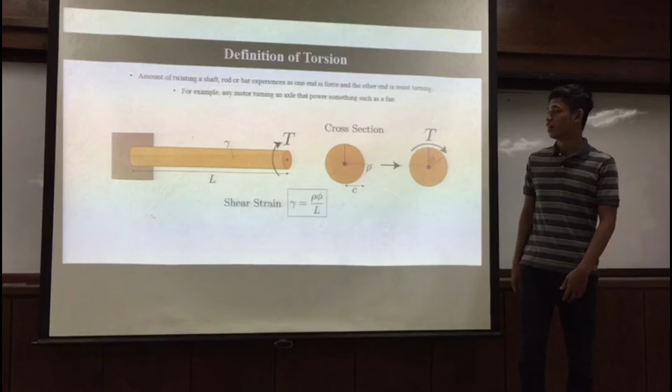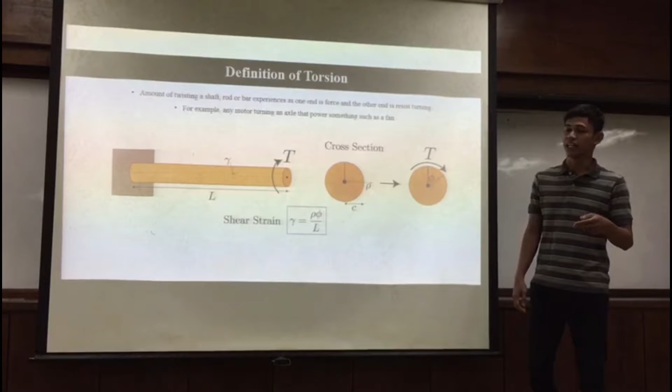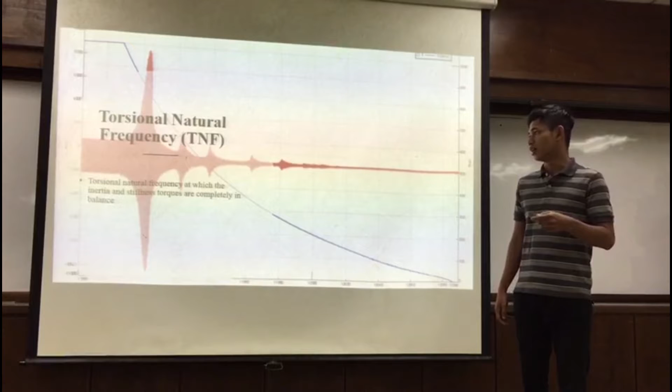I'm going to explain to you about the definition of torsion. Torsion is the amount of twisting a shaft, rod, or bar experiences as one end is forced and the other end is resisting. For example, any motor turning a shaft that produces power, such as a fan. Torsional natural frequency is the frequency at which inertia and stiffness torque are completely in balance.

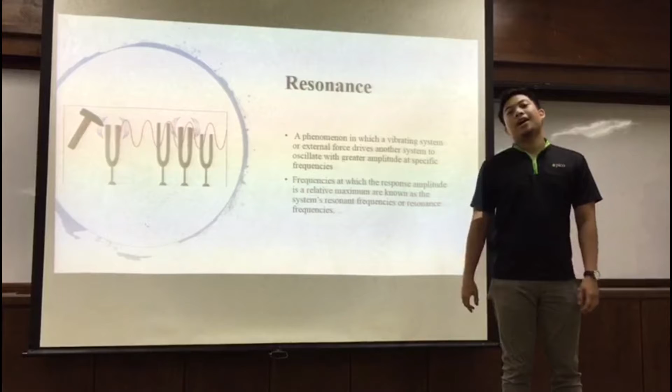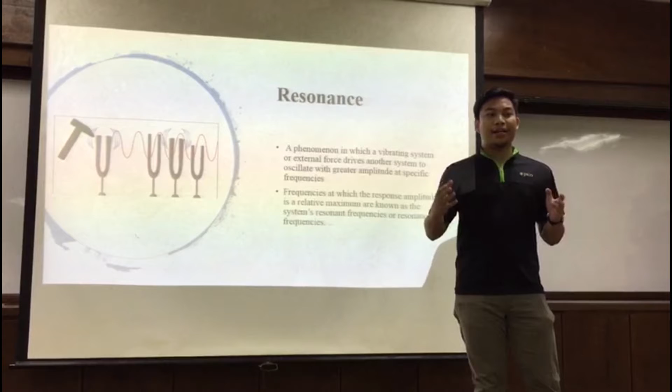Hi, I'm Afnan Rozani. I'm going to explain to you about the definition of resonance. Resonance is a phenomenon in which a vibrating system or external force drives another system to oscillate with greater amplitude at specific frequencies.

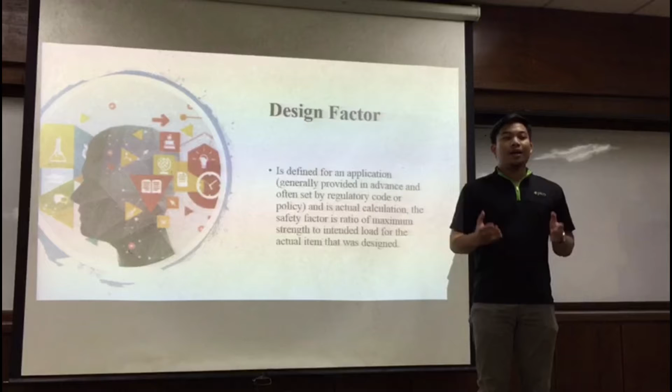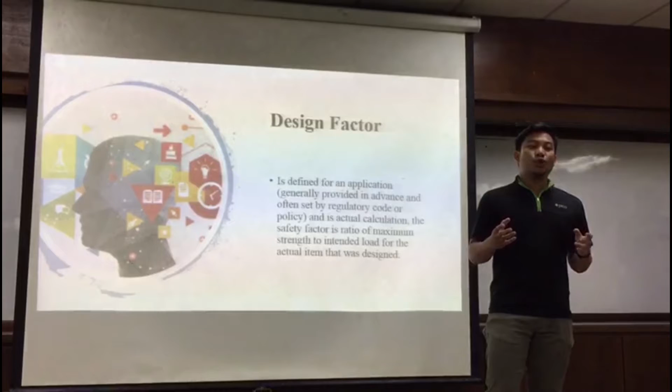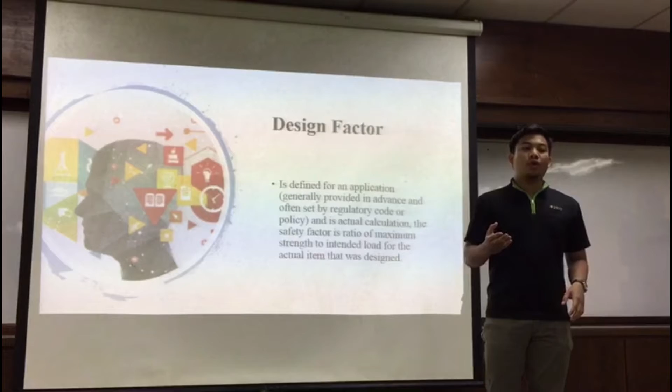Definition of design factor: the design factor is defined for an application, generally provided in advance and often set by regulatory code or policy, and its actual calculation. The safety factor is the ratio of maximum strength to intended load for one item that was designed.

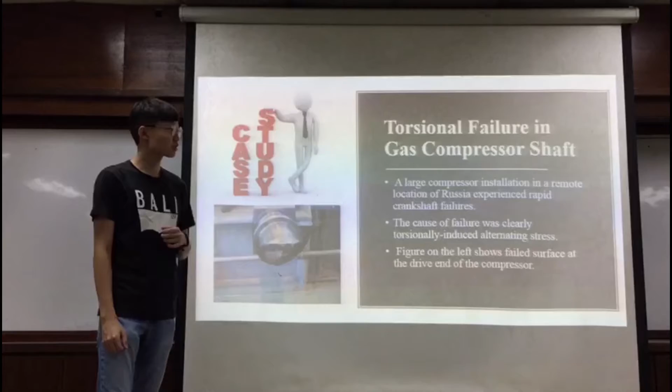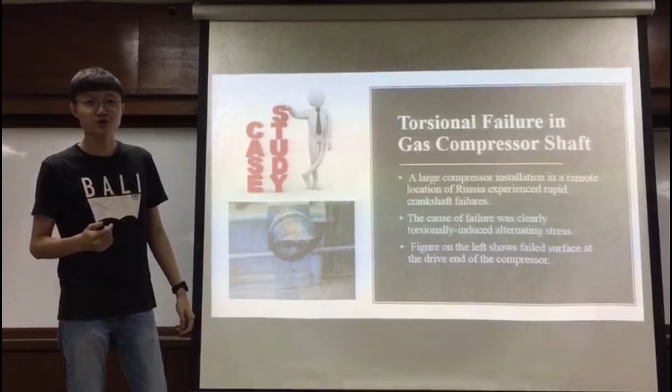The case study for our project is about torsional failure in a gas compressor shaft, which occurred at the outskirts of Russia, where the compressor experienced rapid crankshaft failures. The cause of the failure is mainly torsionally induced alternating stress. As you can see in the picture here, the end of the compressor experienced a failed surface.

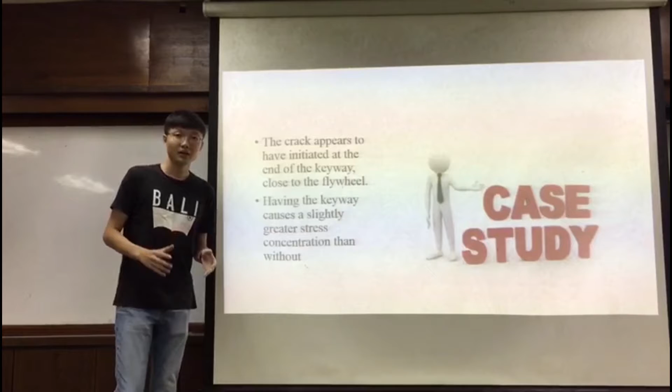Before the failure, cracks appeared to be initiated at the end of the keyway close to the flywheel. Having the keyway causes greater stress concentration at that point, which causes the failure to occur.

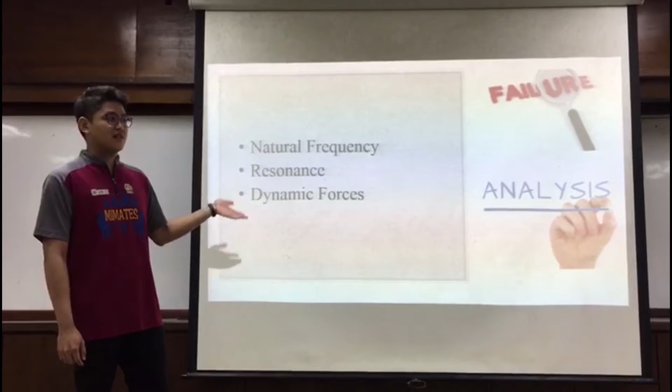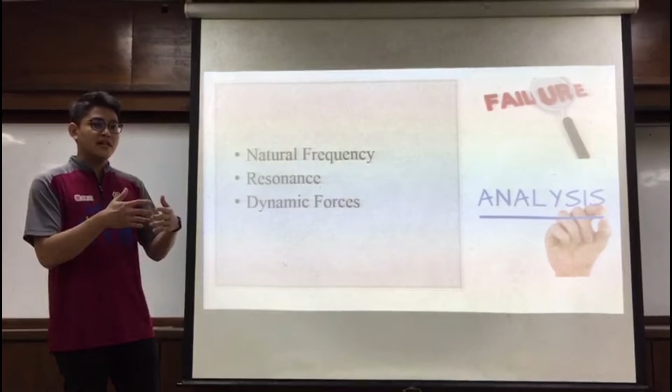Today I will talk about, as Chen says, our failure of the compressor gas shaft. Why does the failure occur? First, the natural frequency. The natural frequency occurs when the shaft is moving; the shaft will experience a frequency. When the frequency reaches the natural frequency, the shaft will experience breakage or destruction.

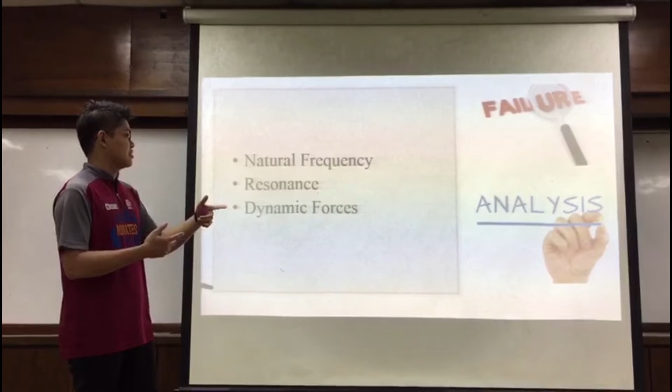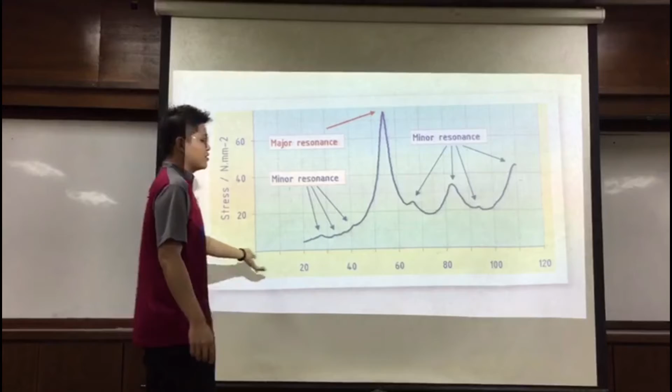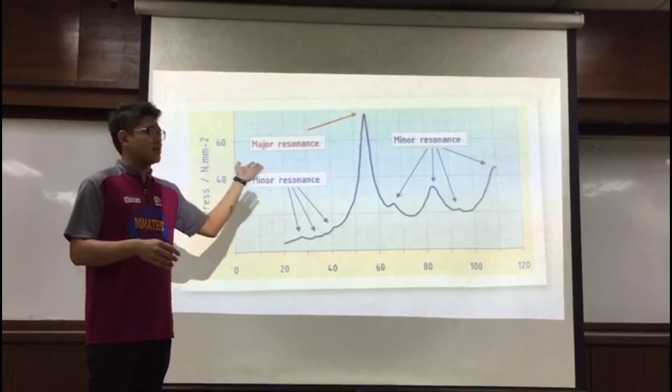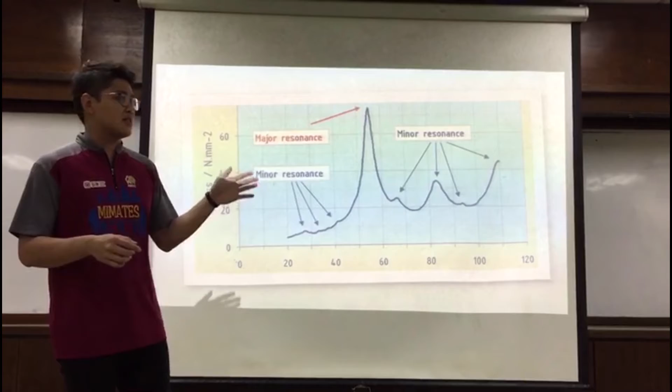The major resonance is where the failures start to occur. Before 55 RPM and above 55 RPM, the crankshaft will experience a frequency which is within an acceptable range.

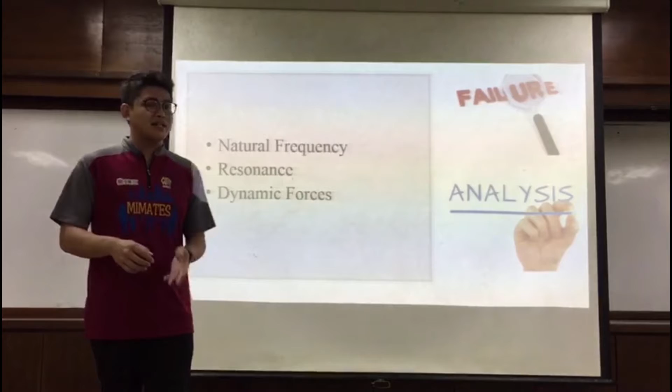Next, dynamic force. What is dynamic force? Dynamic force is the force experienced by the crankshaft, resulting in extra thrust on the shaft, which causes the crankshaft to fail.

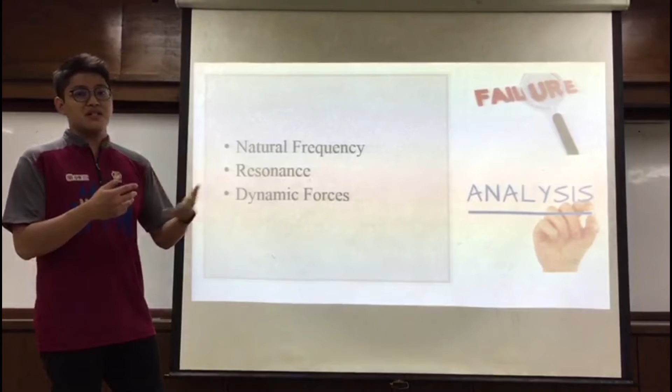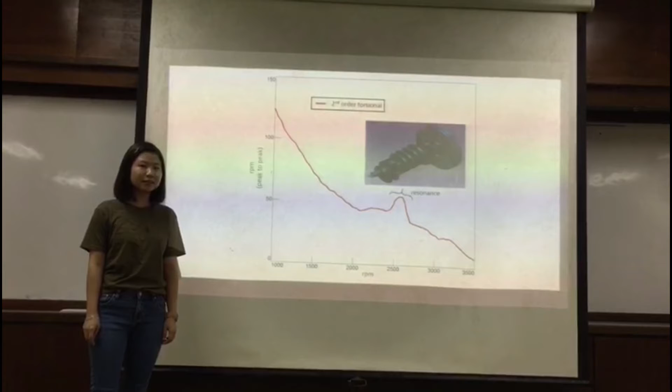So how does torsional vibration come from? Torsional vibration comes from two loads. First is the gas load, which acts on the pistons and is transmitted to the crankshaft in the compressor. The next is the inertial load due to the weight of the piston. By adding these two loads, we can find the combined torsional vibrational load in the system.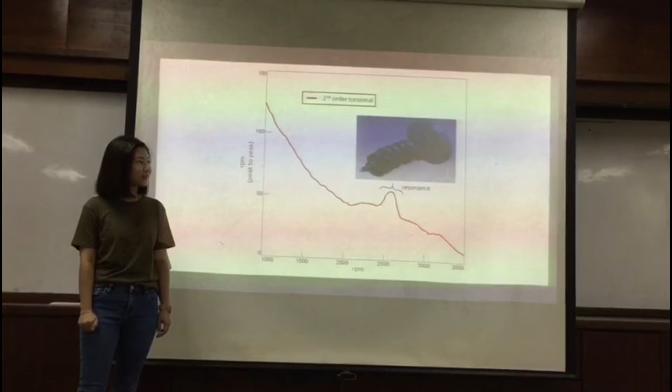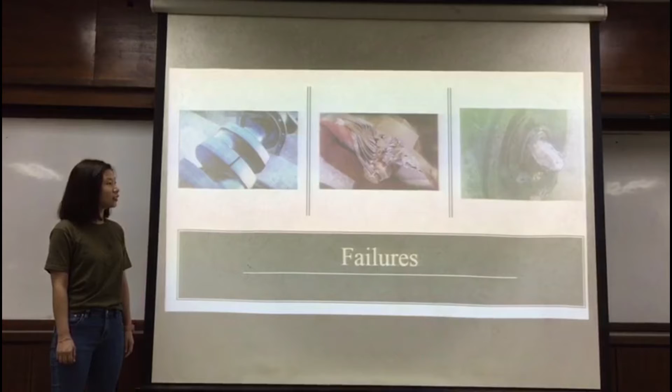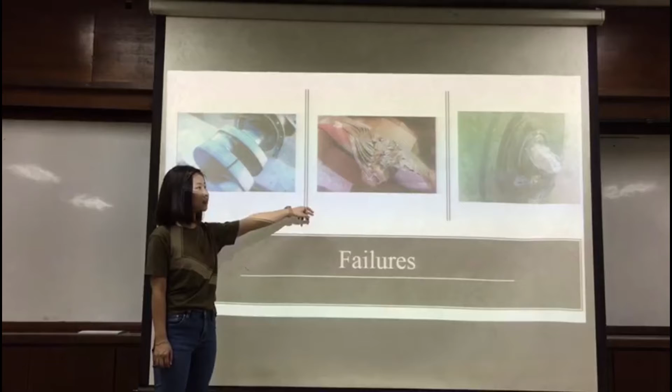Therefore, torsional analysis is very important in predicting resonance conditions and vibration conditions. These are the following consequences if the system fails: first, the broken crankshaft; second, destroyed couplings; and third, broken engines.

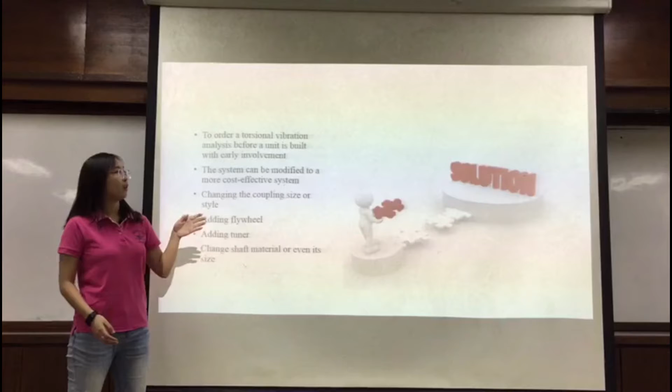Next I will be explaining the solution, which can be set as some suggestions to improve the system. First is to order a torsional vibrations analysis before the system is built.

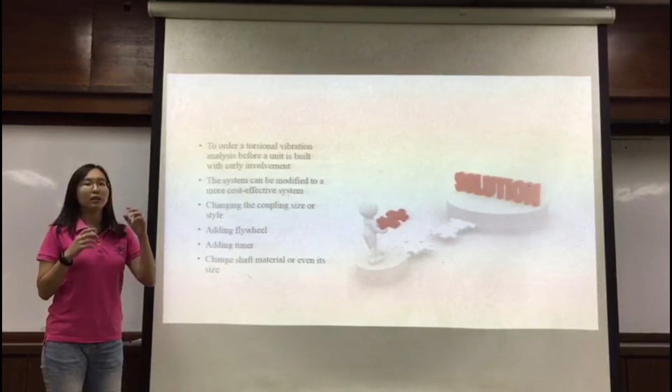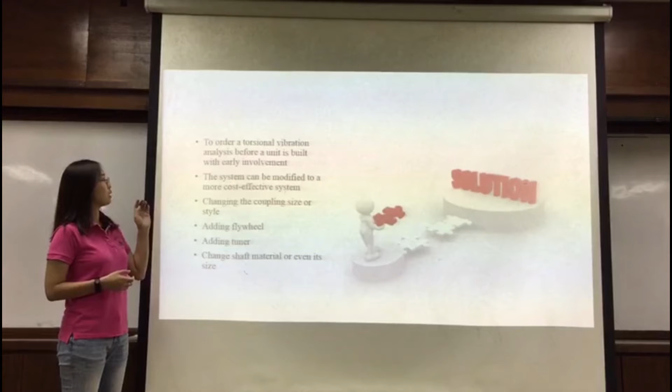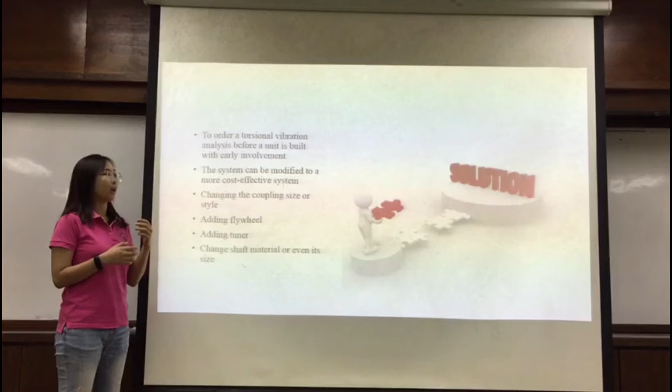This is to ensure that the torsional vibration can be accepted. The system can be modified to a more cost-effective system. Therefore, the system can last longer and not undergo failure easily. The next consideration is changing the coupling size or style.

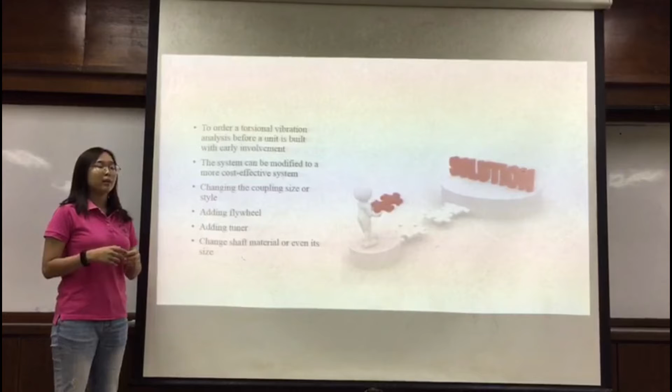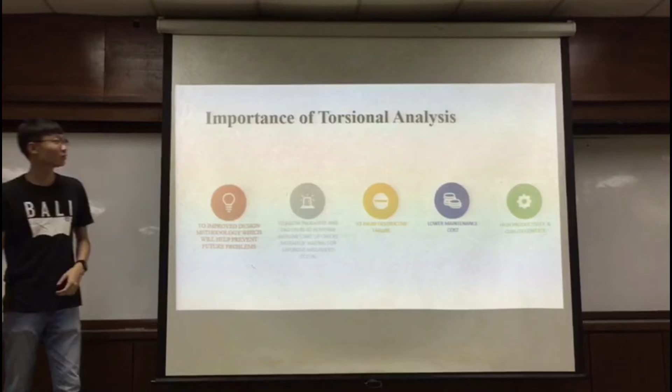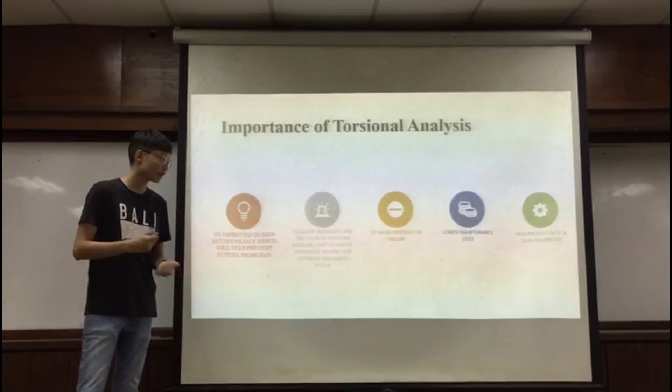There are several reasons why we need to perform torsional analysis. First is to improve the design methodology to prevent future catastrophic failure. Second is to allow the end user to perform baseline startup checks instead of waiting for an expensive failure to occur. Third is to avoid destructive failure and to lower maintenance costs. Last but not least is to improve the productivity of the product and maintain quality.

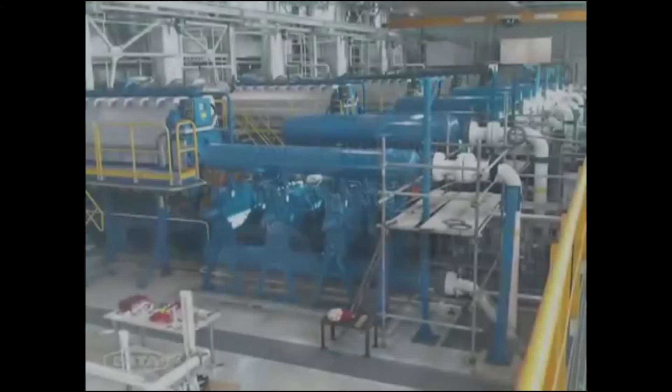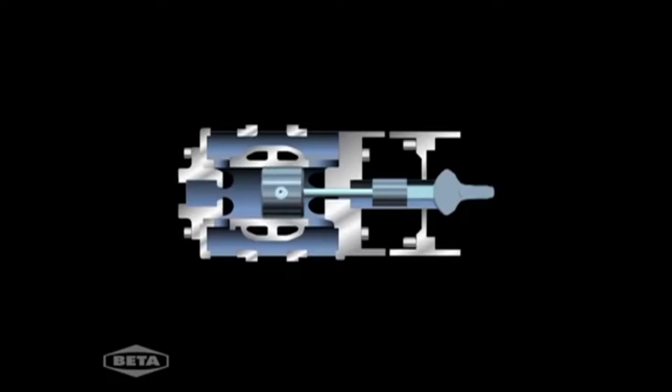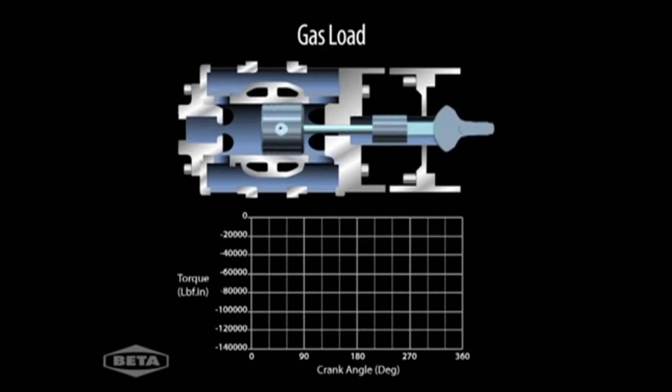All rotating equipment, including compressors, engines, and pumps, will experience a torsional load. One important torsional load is the gas load inside a reciprocating compressor. The gas load acts on the piston and is transmitted to the crankshaft. This chart illustrates the gas load from all the cylinders during one revolution of the crankshaft.

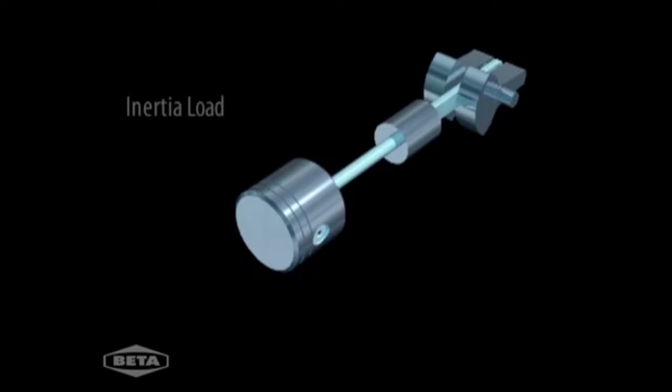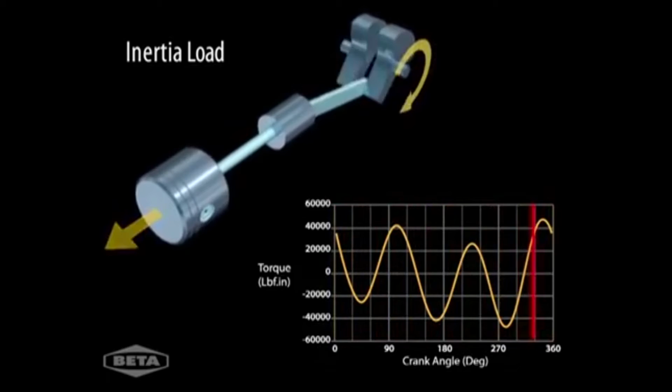Another important load is the inertial load due to the weight of the piston assembly. Inertial load for all cylinders also varies widely over each revolution. By adding together the gas load and the inertial load, we find the combined torsional load for all cylinders in this compressor.

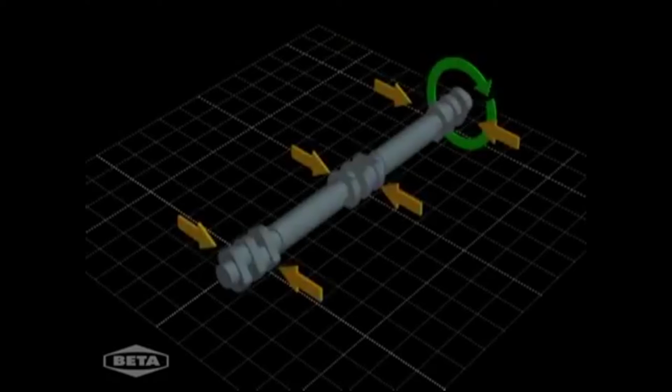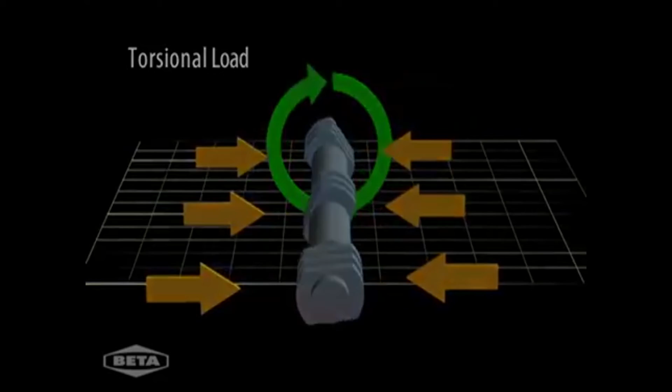The load from each cylinder acts on the crankshaft, resulting in a torque that can cause vibration problems. Each machine will have a unique load profile. A torsional vibration analysis considers how this combined load interacts with the crankshaft, the engine or motor, the coupling, and the resulting stress and vibration on the system.

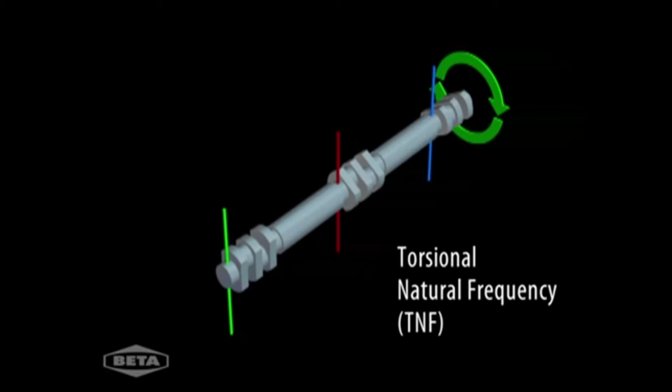A complete drivetrain or torsional system, for example a reciprocating compressor with a coupling and an electric motor, has a torsional natural frequency, or TNF. Torsional natural frequency is defined as the frequency at which a shaft twists back and forth.

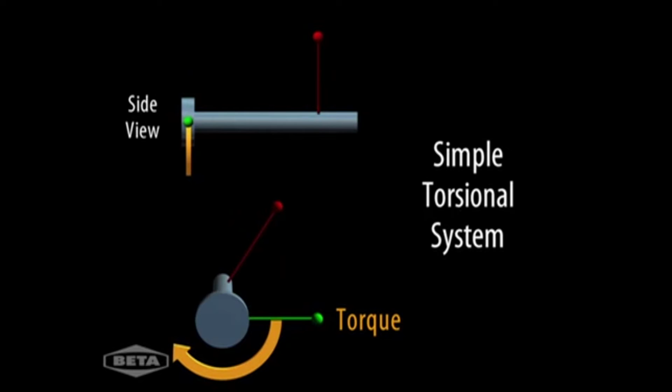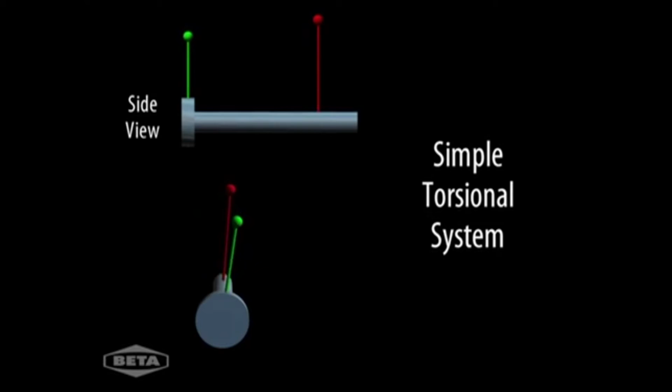Imagine twisting a shaft by rotating one end. After releasing the shaft, it rotates back and forth. This oscillation occurs at the torsional natural frequency. This is analogous to the mechanical natural frequency described in Module 1.

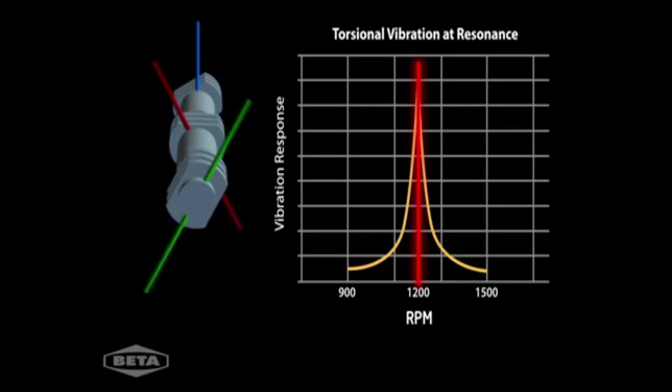Torsional vibration can occur, especially if the system is resonant. In this example, the vibrations are low at 900 RPM. As the speed increases, the system becomes resonant at 1200 RPM when the speed is at the TNF. At resonance, the vibration response is greatly amplified. Above the resonant frequency, vibration response is significantly reduced.

The torsional analysis must accurately predict resonant conditions and vibration problems. If not, the results can be catastrophic: destroyed couplings, broken compressor shafts, broken motor shafts, not to mention the downtime and cost if the unit is inoperable for 1 to 2 months.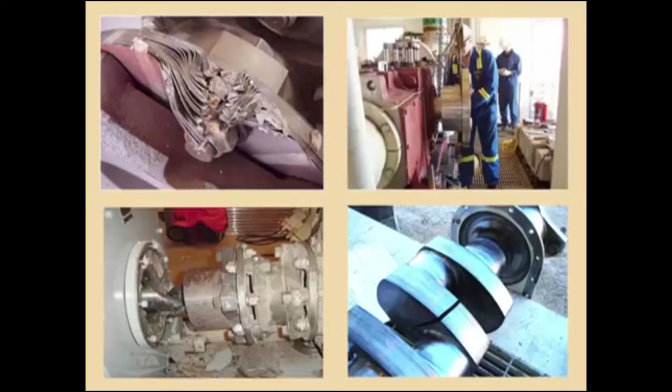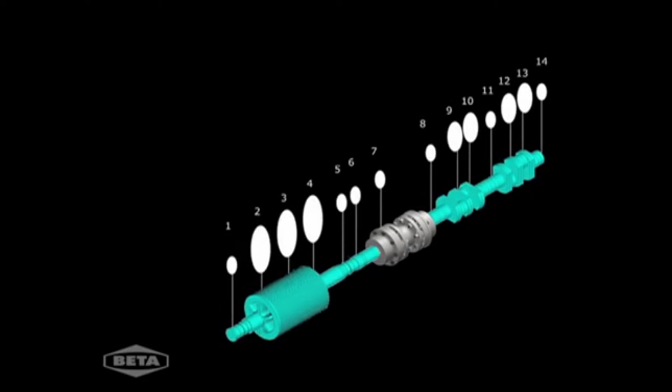Torsional vibration is often called the silent killer because a failure like this occurs without warning. The best way to mitigate these failures is to order a torsional vibration analysis before a unit is built. With early involvement, the system can be modified more cost-effectively and easily than later.

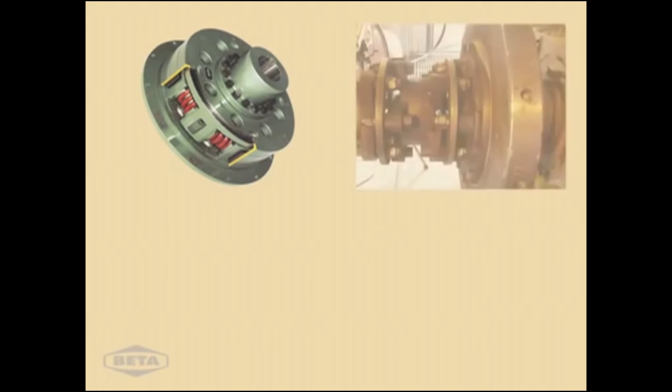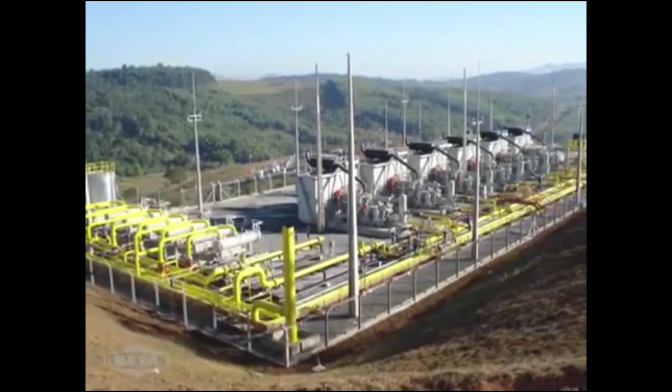Changing the coupling size or style, adding a flywheel or a detuner, and changing the shaft material or size are all easily done if the components haven't been built. If the system is already built, needed modifications are often more expensive and complicated, resulting in delayed delivery of the unit. The next time you are involved with ordering or designing a rotating system, it is highly recommended that you have a torsional analysis performed.

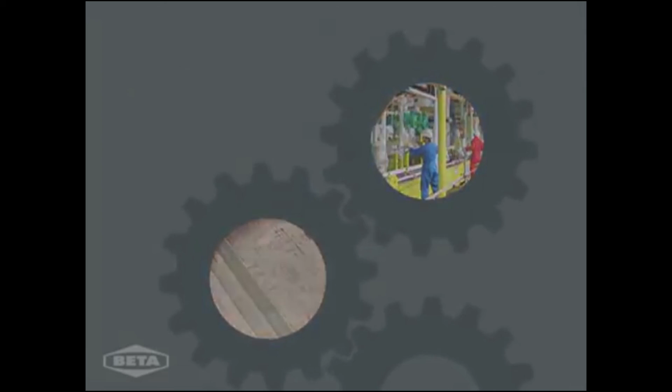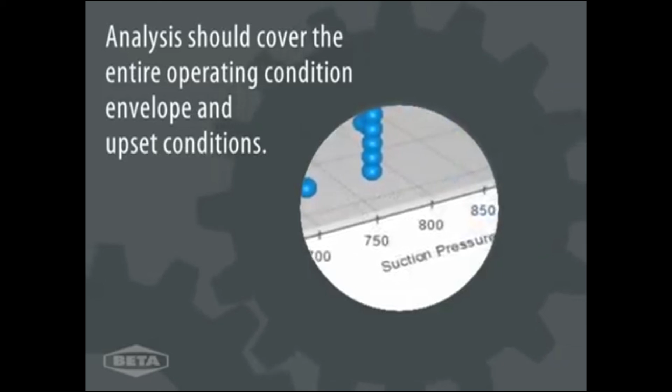This module is a brief introduction on torsional vibration analysis. The key points are that torsional vibration can result in failure. A torsional vibration analysis should be performed very early in the package design phase. The analysis should adequately cover the entire operating condition envelope, including upset conditions, while addressing tolerances in manufacturing and installation.